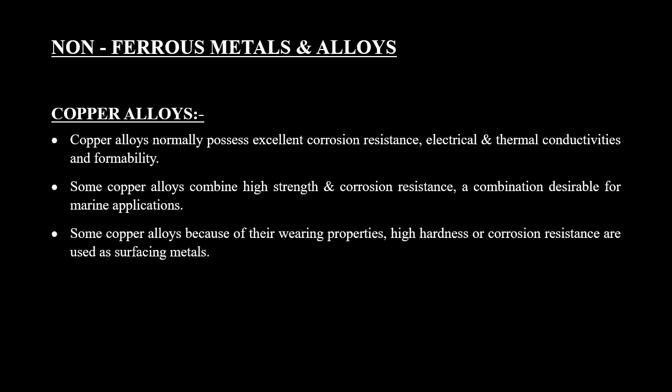Copper alloys. Copper alloys normally possess excellent corrosion resistance, electrical and thermal conductivities, and formability. Some copper alloys combine high strength and corrosion resistance, which is desirable for marine application. Some copper alloys, because of their wearing properties, high hardness or corrosion resistance, are used as surfacing metals. Some copper alloys are selected for decorative applications because of their appearance.

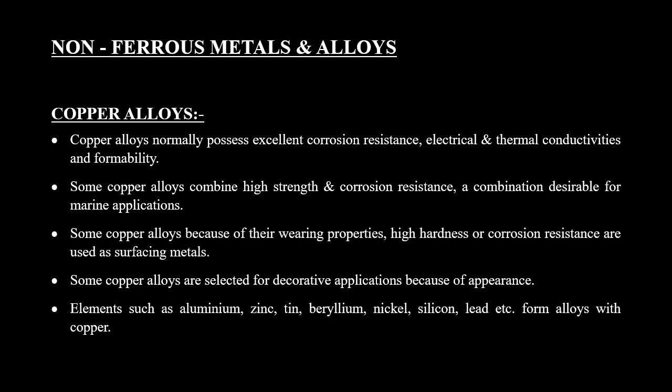Elements such as aluminium, zinc, tin, beryllium, nickel, silicon, lead, etc. form alloys with copper. Copper alloys may be classified as high copper alloys, Muntz metal or yellow metal, naval brass, bronzes, and gunmetal.

High copper alloys. High copper alloys contain 96 to 99.3% of copper. They possess enhanced mechanical properties due to the addition of small amount of alloying elements such as chromium, zirconium, beryllium, and cadmium. A few typical high copper alloys are copper with 1% of cadmium,

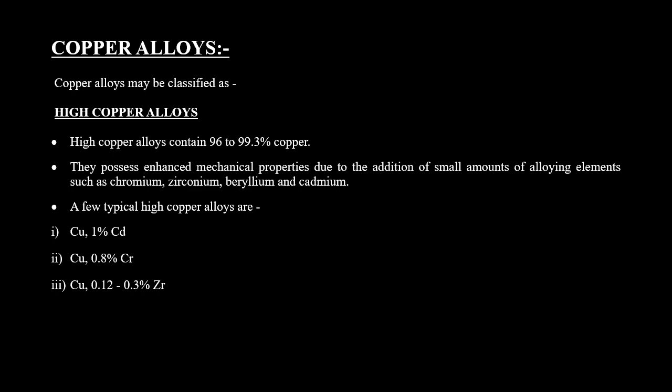copper with 0.8% of chromium, copper with 0.12 to 0.3% of zirconium, copper with 1.5 to 2% of beryllium. Such alloys are used for electrical and electronic components as resistance welding electrodes, wire conductors, diaphragms, and pump parts.

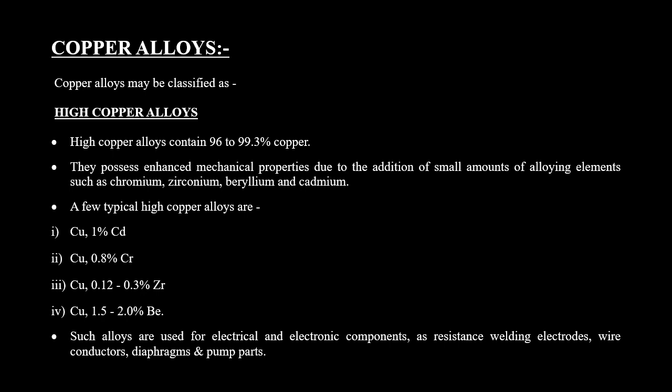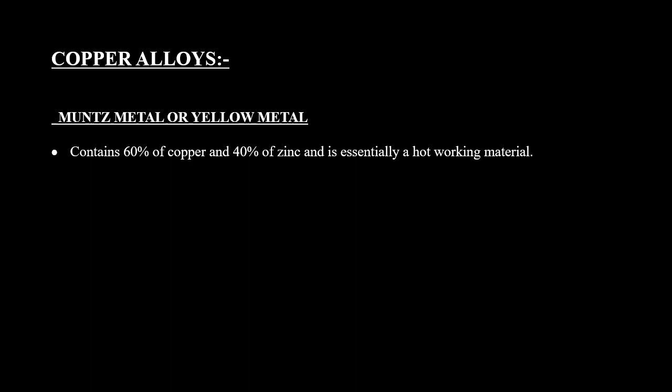Muntz metal or yellow metal. It contains 60% of copper and 40% of zinc and is essentially a hot working material. It is manufactured in the form of hot rolled plate and hot rolled rod or extruded sections in a great variety of shapes and sizes.

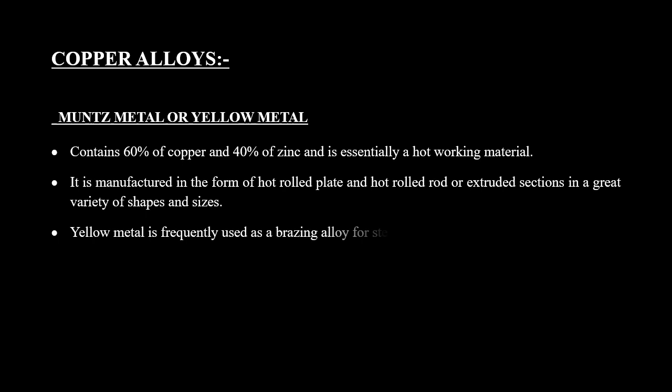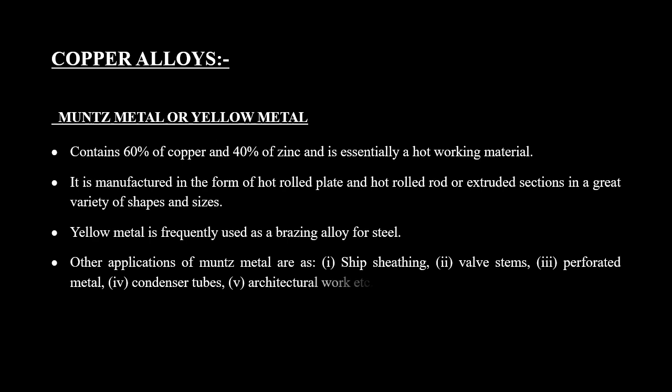Yellow metal is frequently used as a brazing alloy for steel. Other applications of muntz metal are ship sheathing, valve stems, perforated metal, condenser tubes, architectural work, etc.

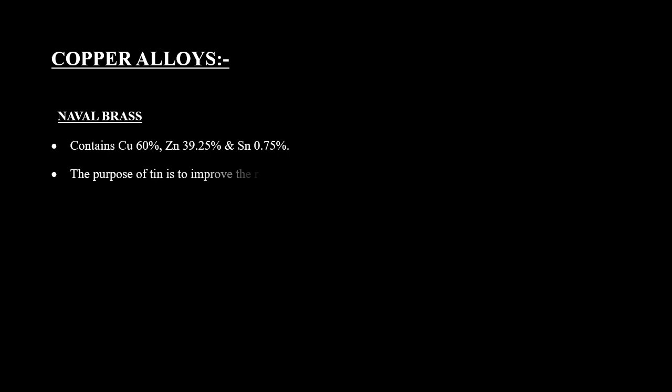Naval brass. It contains 60% of copper, 39.25% of zinc, and 0.75% of tin. The purpose of tin is to improve the resistance to corrosion.

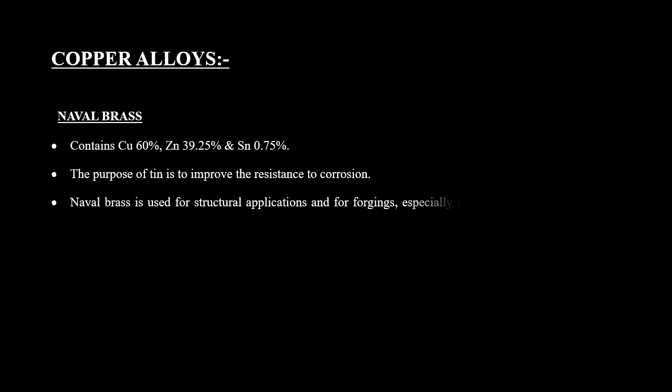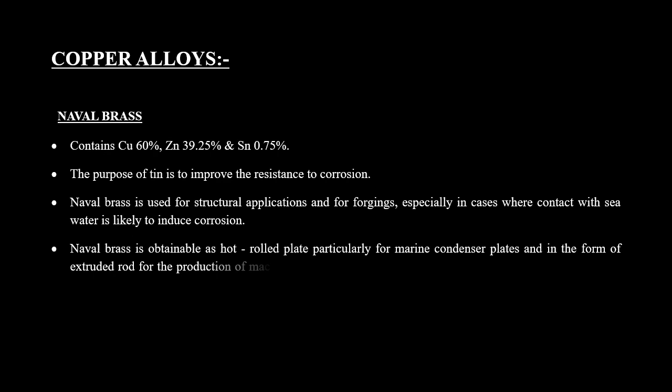Naval brass is used for structural applications and for forgings, especially in cases where contact with seawater is likely to induce corrosion. Naval brass is obtainable as hot rolled plate, particularly for marine condenser plates, and in the form of extruded rod for the production of machined or hot forged components.

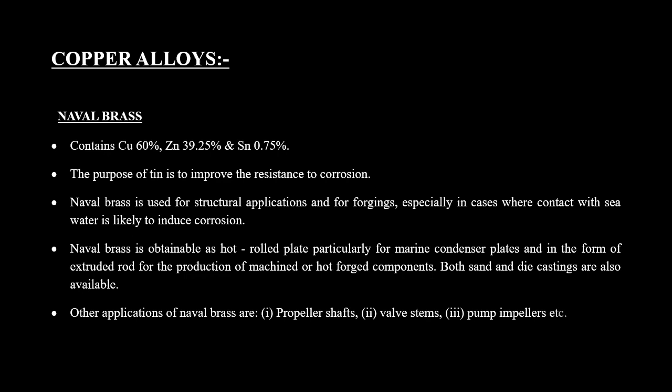Both sand and die castings are also available. Other applications of naval brass are propeller shafts, valve stem, pump impellers, etc.

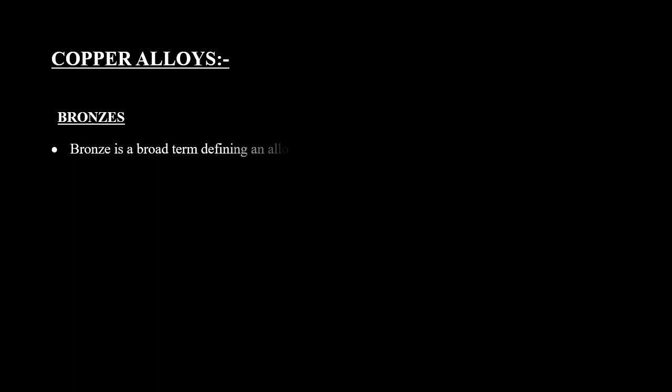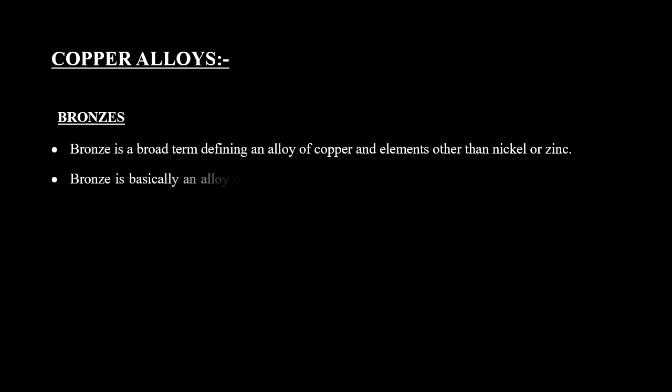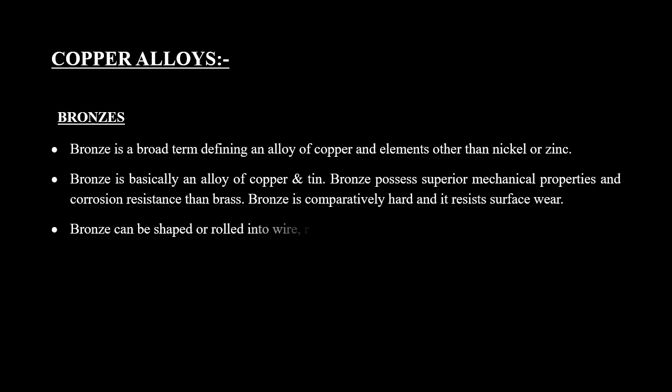Bronzes. Bronze is a broad term defining an alloy of copper and elements other than nickel or zinc. It is basically an alloy of copper and tin, which possesses superior mechanical properties and corrosion resistance than the brass. It is comparatively hard and can resist the surface wear. Bronze can be shaped or rolled into wire, rod and sheets.

Different types of bronzes are phosphor bronze, aluminum bronze, silicon bronze. Phosphor bronze.

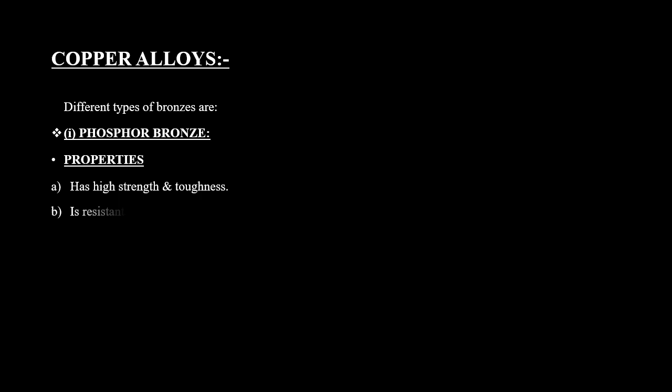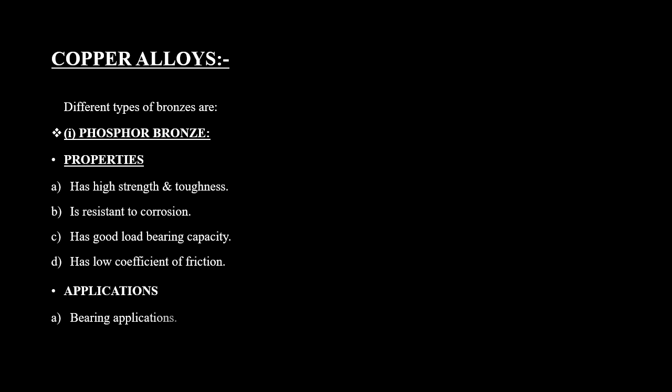Properties are: it has high strength and toughness. It is resistant to corrosion. It has good load bearing capacity. It possesses low coefficient of friction. The applications of phosphor bronze are bearing applications, making pump parts, lining, springs, diaphragm, gears, clutch discs, bellows, etc.

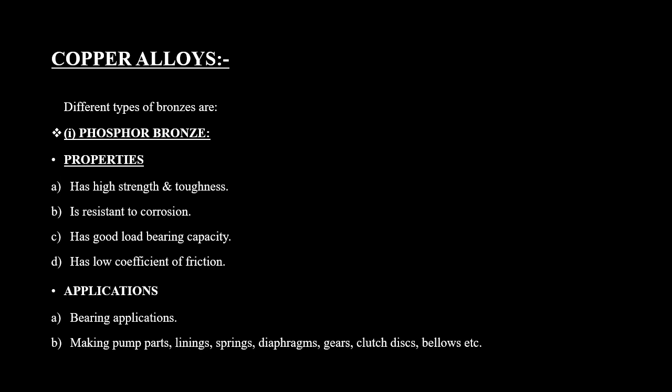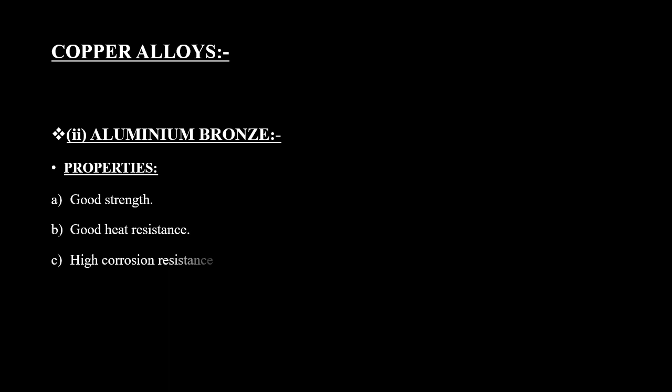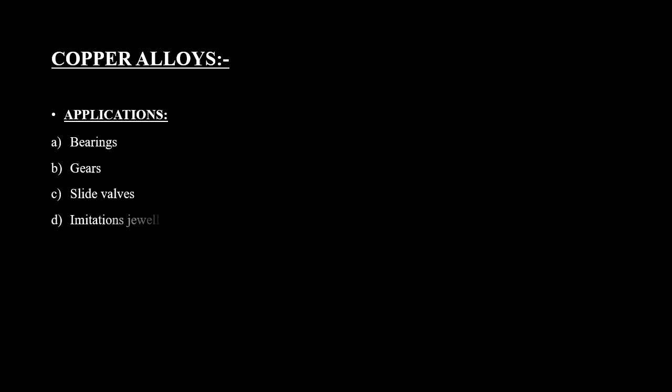Aluminium bronze. Properties include good strength, good heat resistance, high corrosion resistance, good cold working properties, etc. It is used in bearings, gears, slide valves, imitation jewelry, valve seats, propellers, cams, pumpers, etc.

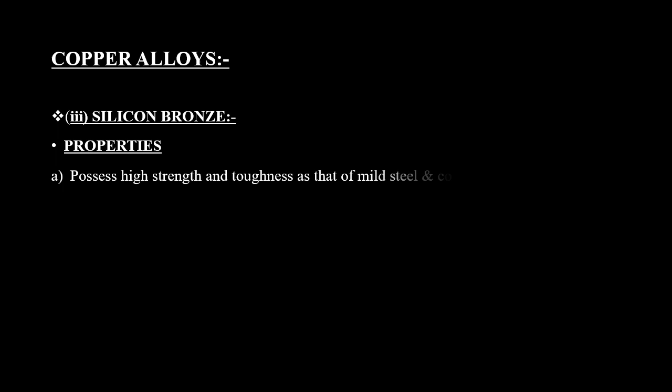Silicon bronze. Properties are: it possesses high strength and toughness as that of mild steel and corrosion resistance as that of copper. Silicon bronze can be cast, rolled, forged and pressed hot or cold.

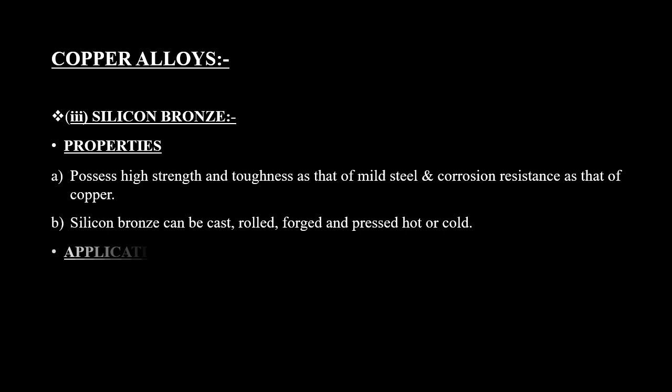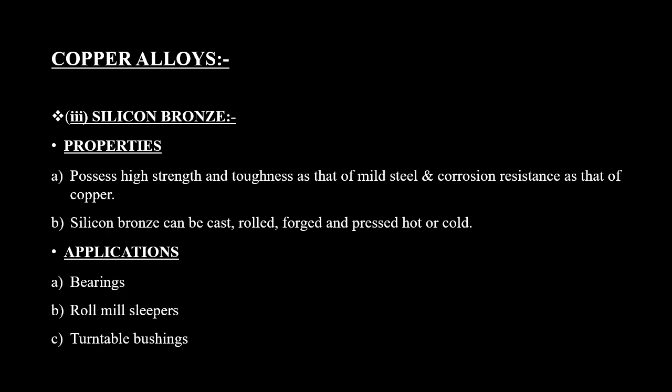Applications of silicon bronze are as bearings, roll mill sleepers, turntable bushings, marine hardware. It is also used in ways and gibs, screw down nuts, boiler parts, die cast parts, etc.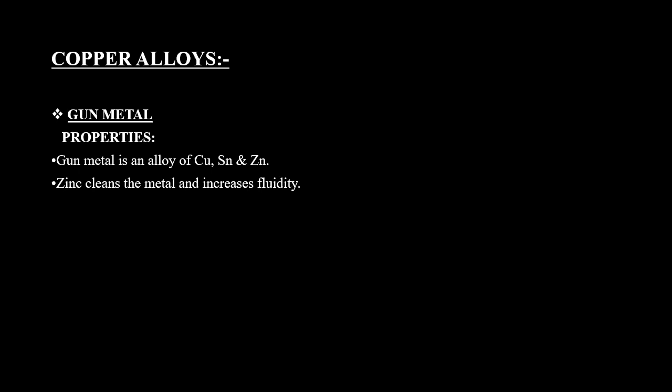Gunmetal. The properties of gunmetal are: it is an alloy of copper, tin and zinc. Zinc cleans the metal and increases the fluidity. A small amount of lead may be added to improve the castability and machinability.

Gunmetals are classified as Admiralty gunmetal, nickel gunmetal and leaded gunmetal. Admiralty gunmetal. It contains 10% of tin, 2% of zinc, maximum 1.5% of lead, 15% maximum nickel and the rest is copper. It is widely used for pumps, valves and miscellaneous castings and also used for statuary.

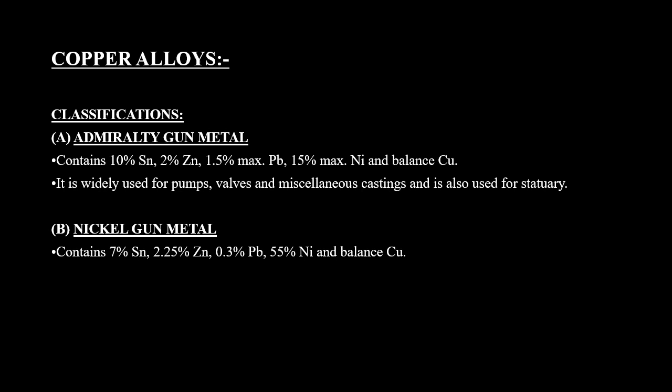Nickel gunmetal. It contains 7% of tin, 2.25% of zinc, 0.3% of lead, 55% of nickel and the balance is copper. When sand cast and heat treated, it has a tensile strength of 430 to 480 Newton per millimeter square.

Leaded gunmetal. It contains 5% of tin, 5% of zinc, 5% of lead, maximum 2% of nickel with copper. This is among the most widely used grades, particularly where pressure tightness is required. The applications of leaded gunmetal are in bearings, steam pipe fittings, marine castings, hydraulic valves and gears, etc.

Here, the part 1 of non-ferrous metals and alloys completed. To know other non-ferrous metals and alloys, please listen part 2.